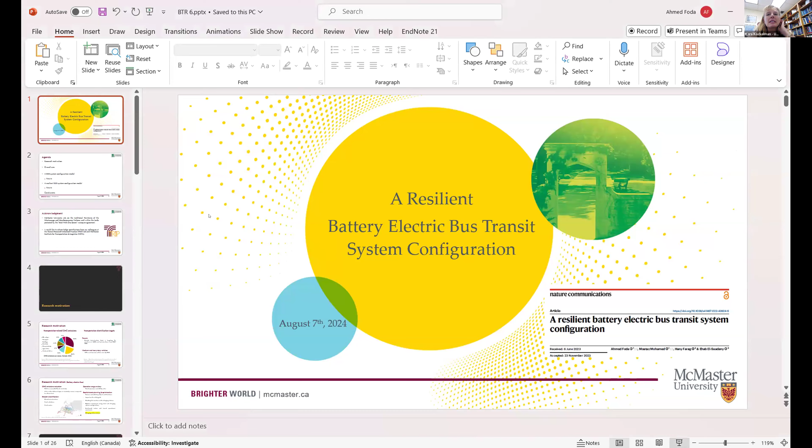Good morning, everyone. Good afternoon, good evening, depending on the place you are. Today I will present, my name is Ahmed Foda, postdoctoral fellow at McMaster University. Today I will present our work titled A Resilient Battery Electric Bus Transit System Configuration. This paper is published in Nature Communications.

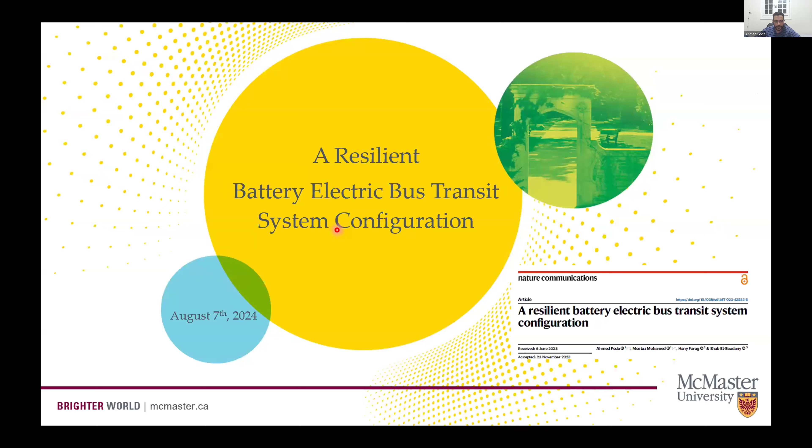My presentation will start by research motivation. After that, I will explain our overall aim in our research and in this contribution specifically. After that, I will discuss two battery electric bus system configuration models. And at the end, I will conclude by some insights from our research.

First of all, I would like to acknowledge the contributions from my colleagues at Trip Lab and also McMaster Institute for Transportation and Logistics.

Motivated by the high share of the transportation-related greenhouse gas emissions, it is often flagged as the first target for emission reduction. One of the main ways to reduce greenhouse gas emissions in transportation is electrification. Our research is mainly focused in transit.

For transit, in Canada, we have a target to reach 5,000 zero-emission buses in the next 5 years, and also for all new sales after 2040 to be zero-emission vehicles.

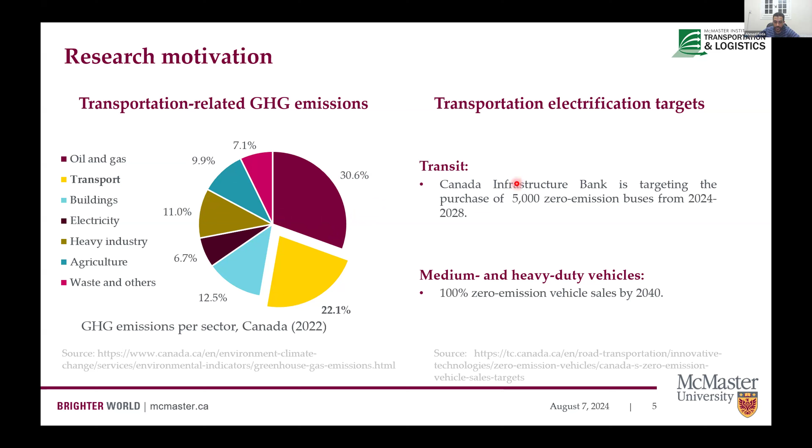The reduction in greenhouse gas emissions after using battery electric buses in transit depends on the electricity sources. If we use renewable-based electricity, it will be almost net zero emission networks. If we use mixed electricity sources, the reduction will be almost 40%.

Another feature making battery electric bus electrification, or the transit electrification, smooth is the transit system characteristics, which includes shared infrastructure, fixed schedules, and also fixed routes.

However, there is a main limitation for using battery electric buses in transit, which is range anxiety. And also there is a need for sophisticated planning and optimization efforts, because we need to decide the optimal location of charging stations, configuration of a charging station, charging schedule, reducing the impact on the utility grid, balancing contradictory objectives and decisions.

And also considering real-world factors and transit operational constraints. There is also an additional point which should be considered in design, which is charging station failure. This point we are focusing on in this research.

The overall aim of my research is to develop a resilient and reliable battery electric bus system configuration that could be applied to any transit network to provide precise planning and operation decisions to transit agencies, including infrastructure location, component sizing, operational energy management system, upfront and ongoing expenses, while considering real-world practices and operations.

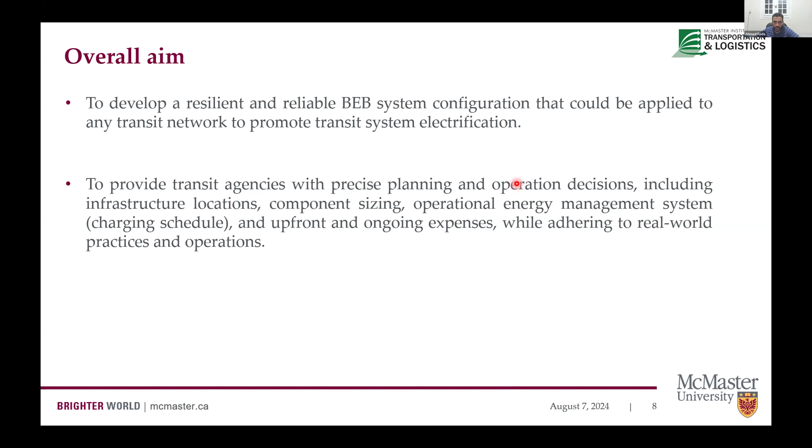For this work, in this paper, we are focusing on constructing a resilient battery electric bus system that is robust against charging station disruptions while maintaining the same level of service of the transit network.

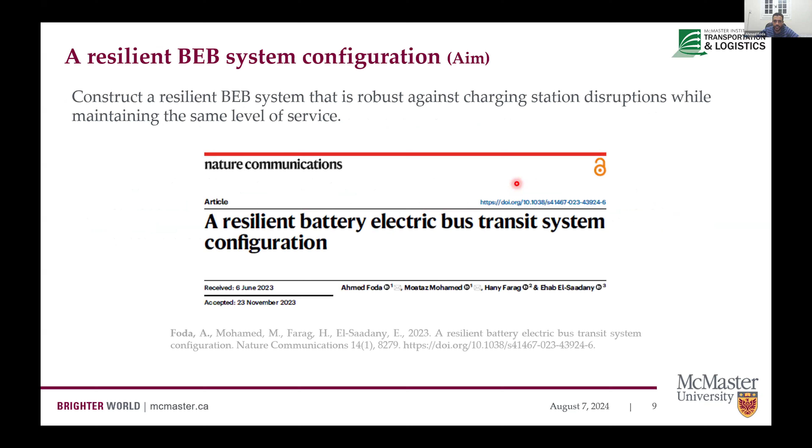First, we designed a generic battery electric bus system configuration model. This model optimizes the upfront and ongoing operational costs for the electrified transit system, including minimizing infrastructure costs, electricity time-of-use tariffs, peak power demand, and well-to-tank greenhouse gas emissions.

This model will provide the optimal location of charging stations, optimal charger rated power, and the number of chargers in each charging location, and also the battery capacity for each bus.

In addition to the infrastructure decision variables, we also provide the operational decision variables, including the charging schedule. This charging schedule will include all the needed information for charging, including where, when, how long, and how much for each charging event for every bus.

This charging schedule will consider partial and continuous charging strategies. All these will be provided while considering adaptable...

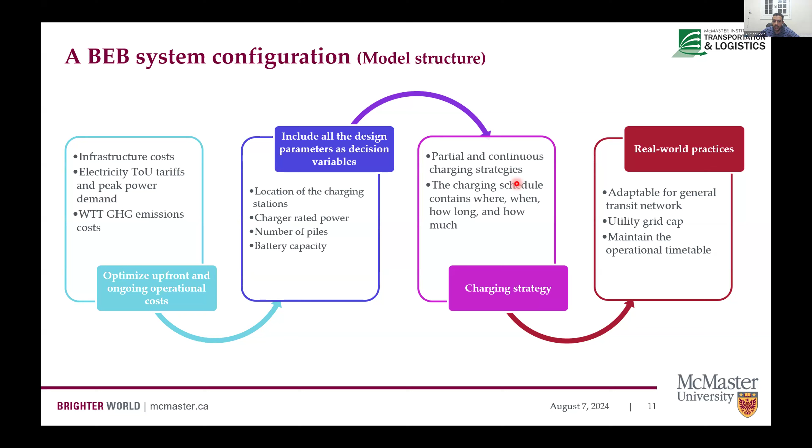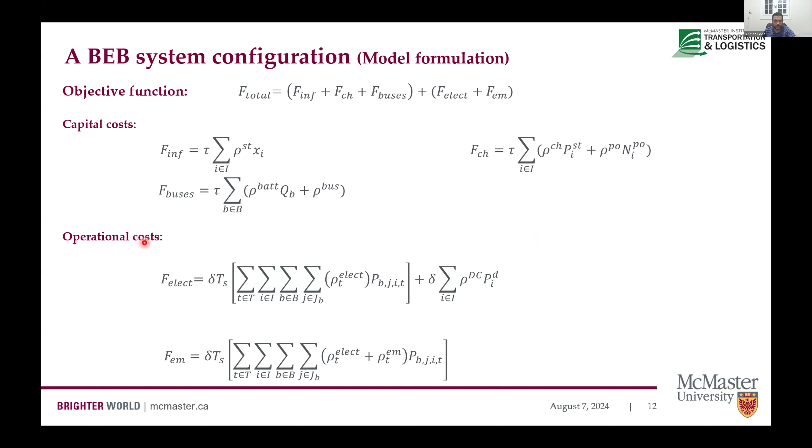This model should be adaptable for general transit networks, including a utility grid cap to reduce the impact on the utility grid, and maintain the operational timetable for the transit network. This is the formulation of our generic model, including capital costs and operational costs, and constraints such as battery electric bus energy constraints, continuous and partial charging schedules, and charging station constraints.

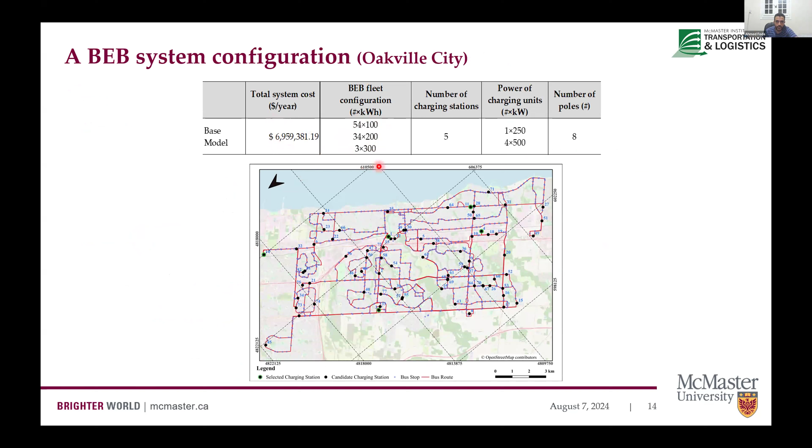We applied this general model to Oakville City. This transit network has 91 buses, and this is the configuration: the total annual system cost, battery electric bus fleet configuration, and the charging station configuration. This is a precise planning for battery electric bus system configuration.

But what if charging stations are disrupted? The charging station could be disrupted because of electricity outage, component failure, or scheduled maintenance. What will be the effect on the battery electric bus fleet? How many buses will fail? What will be the service reduction in the transit system if a charging station is disrupted?

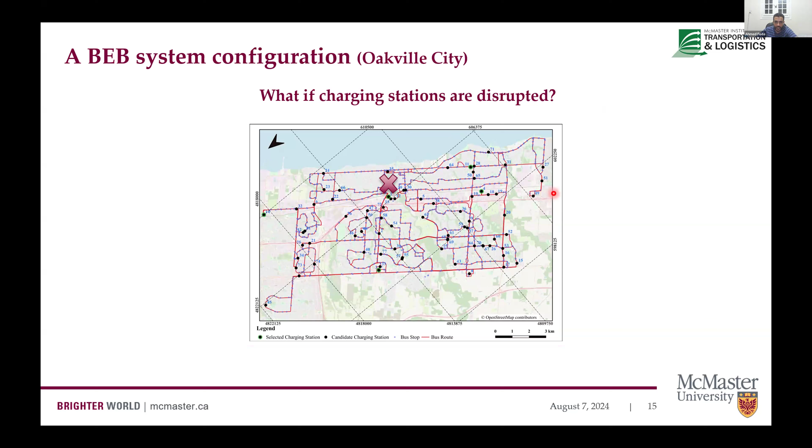We provide some analysis to the design here. In Oakville City, if one charging station is disrupted, the service reduction could be up to 34%. If two charging stations are disrupted at the same time, the service reduction could be up to 58%.

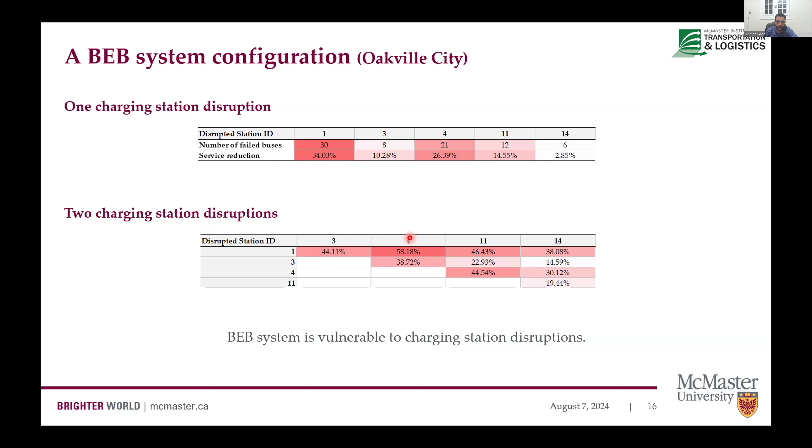From this analysis, we proved that the battery electric bus system is vulnerable to charging station disruptions, and we couldn't ignore the effect of electricity outages or other reasons. We need a resilient battery electric bus system configuration that is robust against charging station disruption.

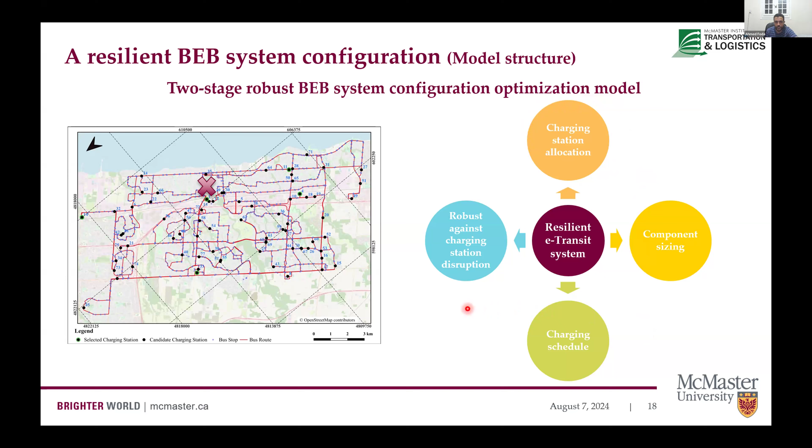Therefore, we developed a two-stage robust battery electric bus system configuration optimization model. This model will provide us with all the planning decision variables, including charging station allocation, component sizing, and charging schedule. In addition, this model will be robust against charging station disruption.

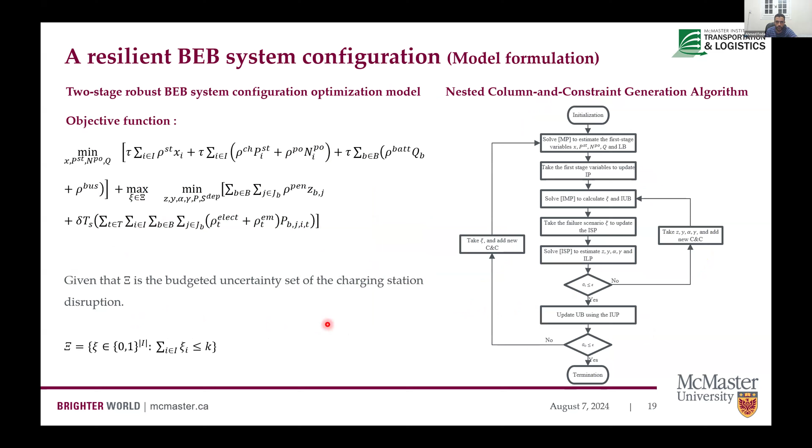This model is formulated as two-stage, with an updated objective function under a budget uncertainty set for the charging station disruption. We used the nested column and constraint generation algorithm to solve this model, and we applied it to Oakville City.

This means the design will provide all the energy and all buses will be fully functional if one charging station is disrupted. The robust model with K equal to 2 will be robust against two charging stations disrupted at the same time, and all buses will operate and finish all scheduled trips.

For example, what is the meaning of full functionality for all buses? Bus ID number 3 needs around 400 kilowatt-hours per day. For robust model K equal to 1, this model is robust against one charging station disruption. This is the distribution of energy charged at each charging location if no disruption occurs.

If one station is disrupted, the charging schedule will be updated and all the required energy will be charged at the other 3 charging stations. This is also the scenario in robust model K equal to 2.

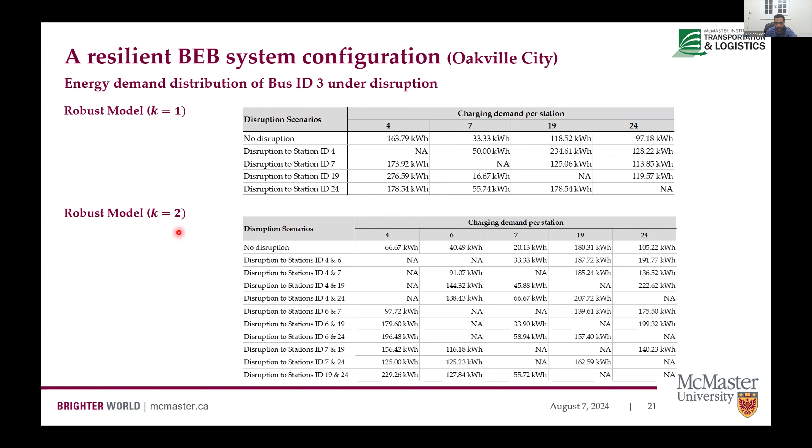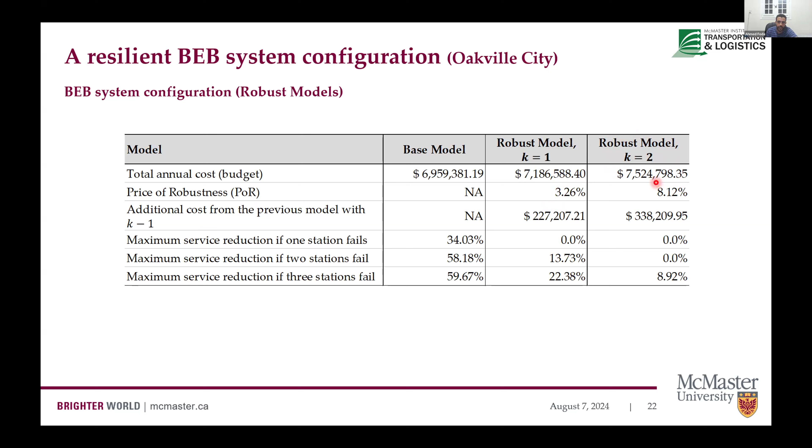But in operations research, we have something called the no free lunch theory. We can't add more benefits without paying some cost. So for the robust or resilient models, we have something called the price of robustness. If we use a robust model with K equal to 1, we pay an additional 3% cost. If we design a robust model with K equal to 2, we pay around 8% additional cost.

This is a comparison between robust model K equal to 1 and K equal to 2 with regard to the base model, in terms of different costs and different energy demand.

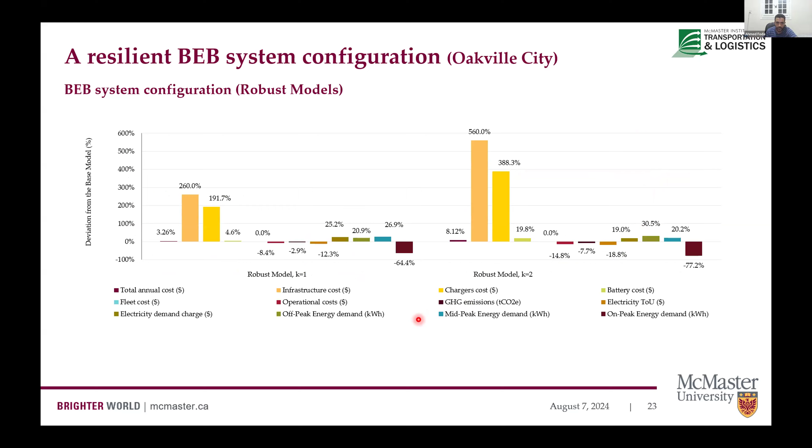From this research, we can conclude that it ensures the optimal resilient battery electric bus system configuration remains fully operational even during failure of charging stations. A resilient battery electric bus system design requires extra costs, but these costs are ultimately lower than the unoptimized expenses incurred after a charging station failure.

The price of robustness for K equal to 1 and K equal to 2 is around 3% and 8% respectively, but these additional costs will prevent a severe reduction in service if one or two charging stations are disrupted. This result shows that the cost of implementing a resilient battery electric bus system is directly related to the conservative level, and determining this level, K in our case, necessitates trading off between factors such as budget and risk in each transit system.

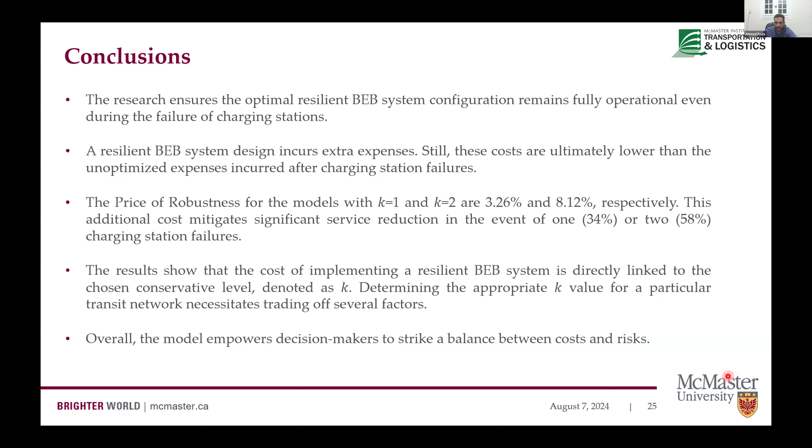Overall, the model empowers decision makers to strike a balance between costs and risks. Thank you so much.

And I think we have our real moderator with us now, Sanjana. Thanks for reading your emails. I just wrote her. Great to have you here. Take it away. Thank you so much, Ahmed. Like I think we are almost back on track in terms of time.

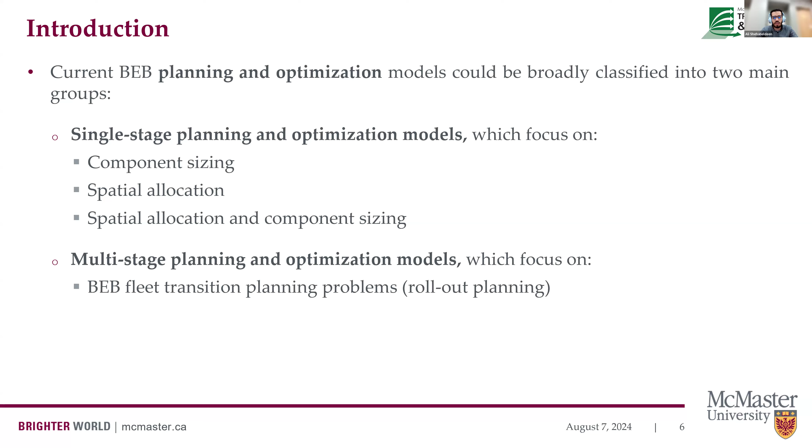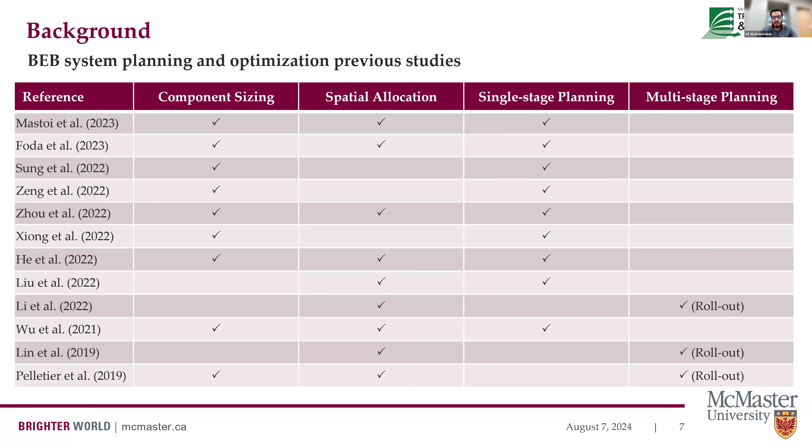This table shows a brief literature review on battery electric bus planning and optimization. As you can see, previous studies determine the optimal battery electric bus system component sizing and the spatial allocation of the charging stations. However, most of them focus on single stage planning. Furthermore, the authors who addressed multi-stage planning only focused on the rollout transition planning, without considering the impact of battery electric bus performance degradation during these transition plans.

As we may know, battery electric bus batteries degrade over time, and this is attributed to cyclic and calendar degradation. Cyclic degradation is associated with charging and discharging cycles as well as temperature. However, the calendar degradation occurs under storage mode when no electric current flows through the battery.

In the literature, there are three main methods to estimate battery degradation: electrochemical, empirical, and semi-empirical methods. In this study, we utilized a semi-empirical one to estimate battery electric bus battery degradation.

Given this previous research gap, the main aim of this study is to answer the main question: what is the impact of battery degradation on the optimal configuration and operation of the battery electric bus system through a 12-year usage life cycle, including spatiotemporal allocation and capacities of charging stations, battery sizing, battery electric bus charging schedule, and battery replacement decisions.

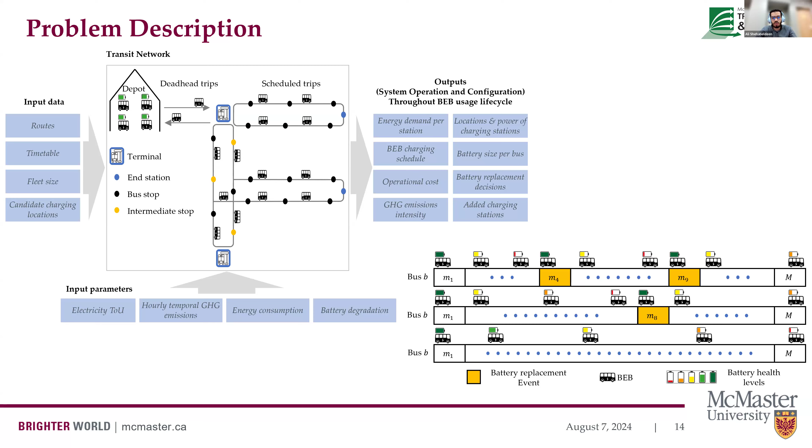Therefore, the main objective is to reduce the total system cost, including capital and operating costs, such as infrastructure cost of the charging station, fleet costs including buses and battery costs, battery replacement costs of purchasing new batteries and selling old ones, electricity time of use, and greenhouse gas emission intensity.

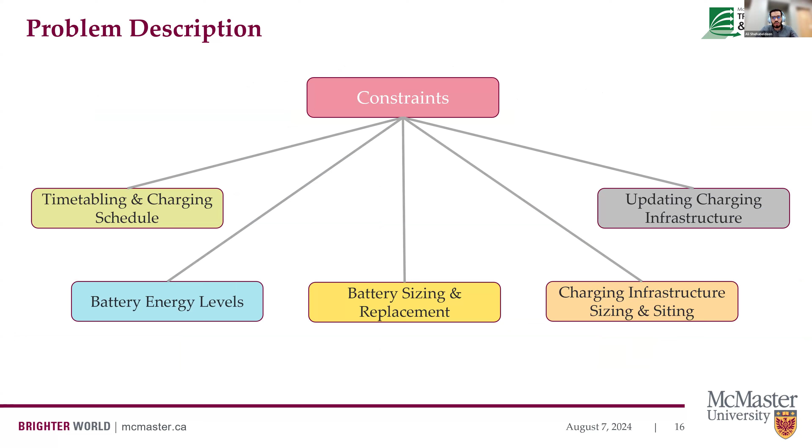This is subject to several constraints, including timetabling and updating charging schedule, battery energy levels, battery sizing and replacement, siting and sizing of the charging station, updating the charging infrastructure, such as adding new charging piles and increasing the capacity of the charging stations.

Our methodology in this study addresses two main challenges. The first is related to integrating battery degradation rates within the optimization model. The second is to develop a multi-stage optimization model that trades off multiple factors, such as battery replacement, adjusting battery electric bus charging schedule, and updating the charging infrastructure to accommodate battery degradation throughout our 12-year usage life cycle.

To address the first challenge, we employed a surrogate-based space mapping algorithm to integrate battery electric bus battery degradation rates within the optimization process. The idea is to develop a coarse model that maps the fine model in a linear formulation, and then this coarse model is improved through an iterative process until a termination criteria is met, reducing the error between the coarse and fine model.

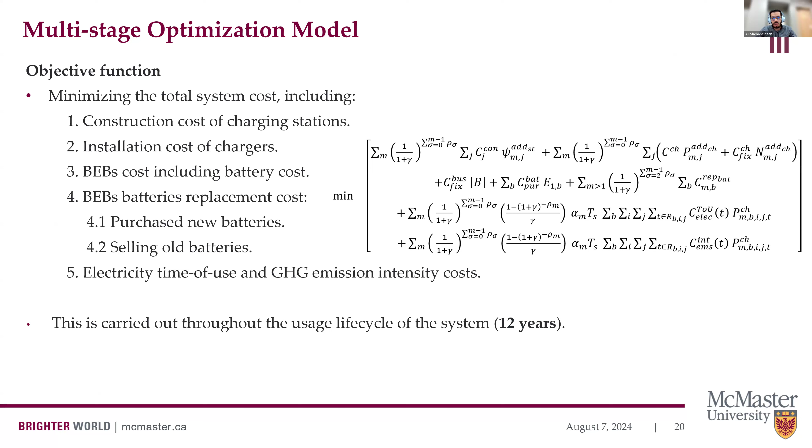Following this approach, we accurately integrate the complex nonlinear battery degradation rates within the optimization process via a mapped linear model. After that, we developed a multi-stage optimization model that informs optimal battery electric bus system configuration and operation, while minimizing the total system cost and considering the impact of battery degradation rates at each stage. As you can see here, we sum over a set of stages respecting the net present value of each stage.

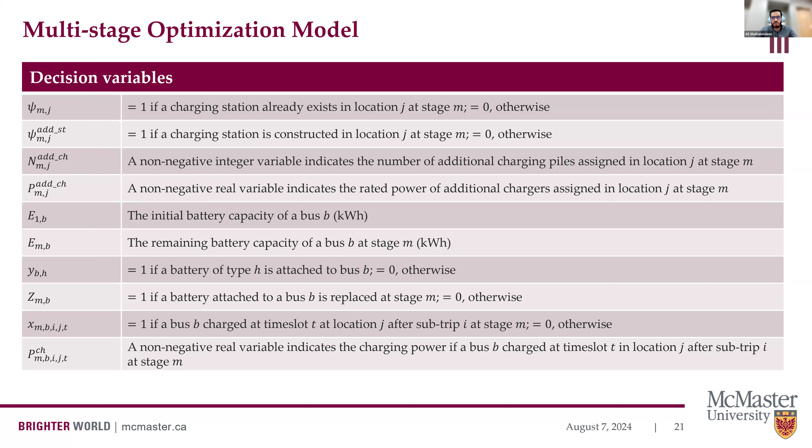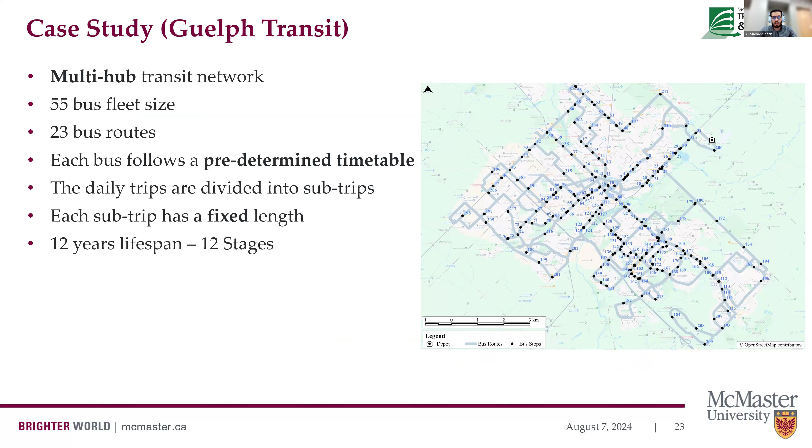We applied the developed model to a multi-hub real-world transit network in Guelph City. The network featured 55 buses and 23 bus routes. Each bus follows a predetermined timetable. The model is tested over a 12-year usage life cycle in 12 stages. As such, our model can inform the transit operators with the optimal configuration and operation decision at the beginning of each year.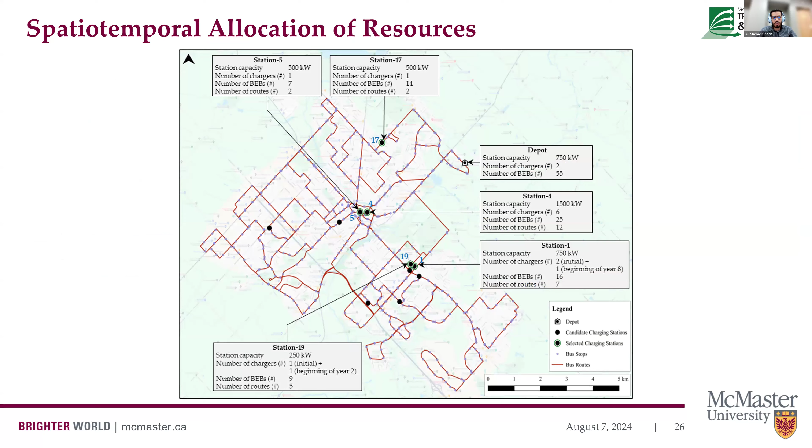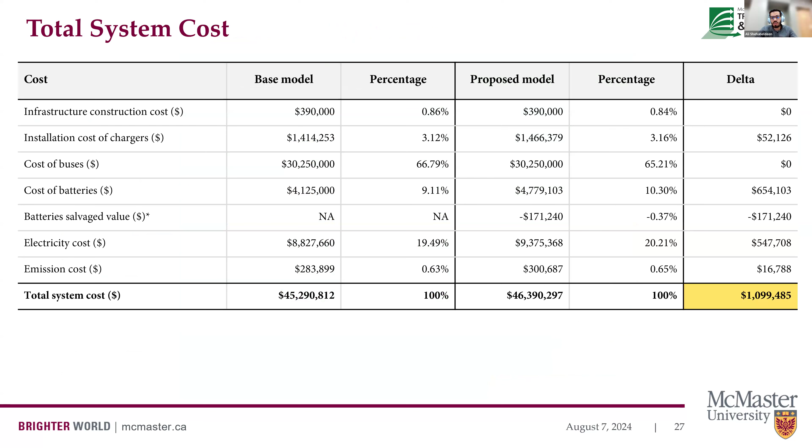Regarding the cost components, this table shows the breakdown of the total system cost. As we can see, considering battery degradation increases the total system cost. However, this cost ensures the feasibility of the battery electric bus system throughout its usage life cycle.

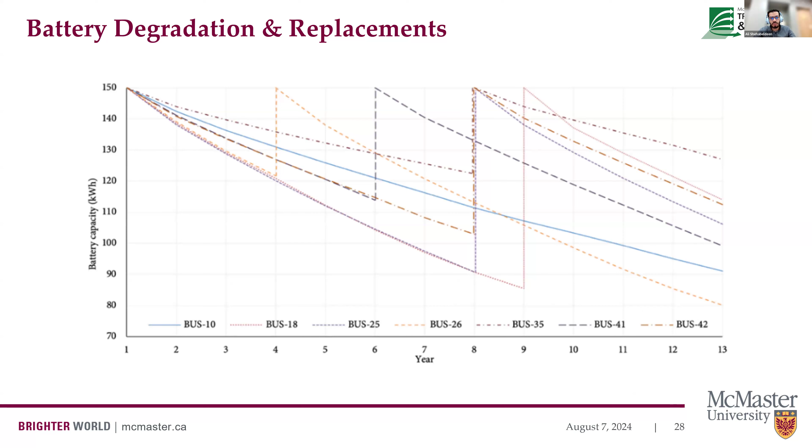Additionally, this figure highlights adjustments in the charging schedule over time to accommodate battery degradation. Unlike the current practice of replacing batteries at 80% of its initial capacity, this figure highlights the importance of integrating battery replacement decision within the optimization process.

That's it. Thank you. And I need to acknowledge that this paper is published in Energy. Thank you.

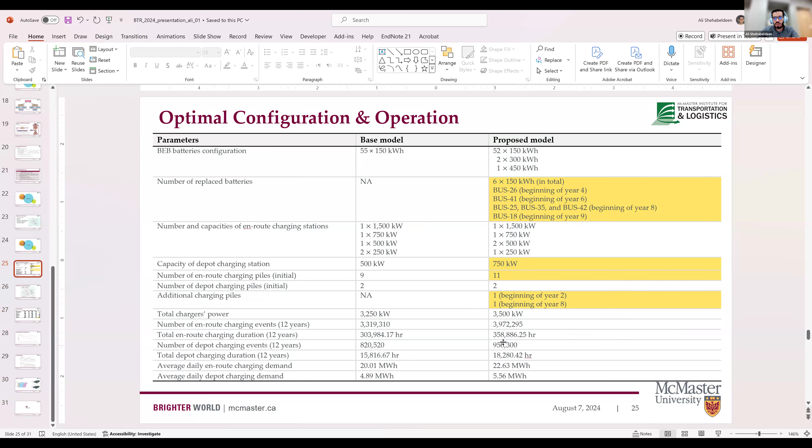Let me just pull up the slides again. Back to the table here. There are 6 buses with battery replacement. This increases the cost. Also, we can see the capacity of the charging station increased. Additional charging piles are added, and there's fluctuation in the charging schedule. This impacts the total system cost here. This is a breakdown for all costs, and the increased percentage between the base model without considering battery degradation and the proposed model considering battery degradation.

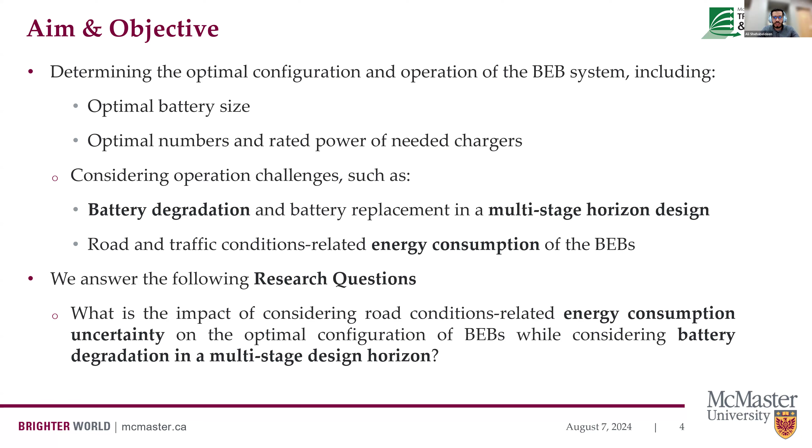Our study aimed to develop a multi-stage optimization model that determines the optimal battery electric bus system configuration and operation, including optimal battery size, spatial allocation of the charging station, number and rated power of the charging piles, while considering battery degradation and energy consumption uncertainty in a multi-stage horizon design.

To achieve this goal, first, we utilized the multi-stage deterministic model developed in our previous study to minimize the total capital cost by determining the optimal allocation of charging stations and component sizing of the battery electric bus system, while considering battery degradation rates and replacement decisions throughout the usage life cycle.

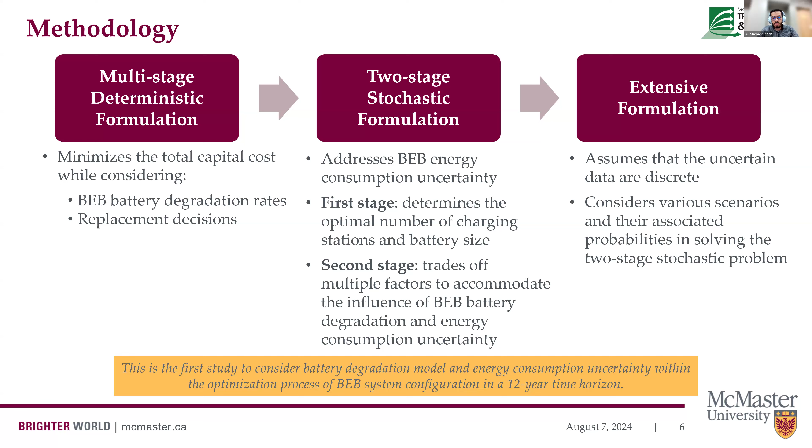Secondly, a two-stage stochastic formulation is developed to address the uncertainties associated with battery electric bus energy consumption. In the first stage, the model determines the optimal number of charging stations and the required battery size for each bus, while in the second stage, the model trades off multiple factors such as replacing batteries, increasing the capacity of the charging station, adding en-route chargers, and adjusting battery electric bus charging schedules to accommodate battery degradation and uncertain events. Lastly, an extensive formulation is developed, assuming discrete uncertain events to examine the model's performance under various uncertain degrees.

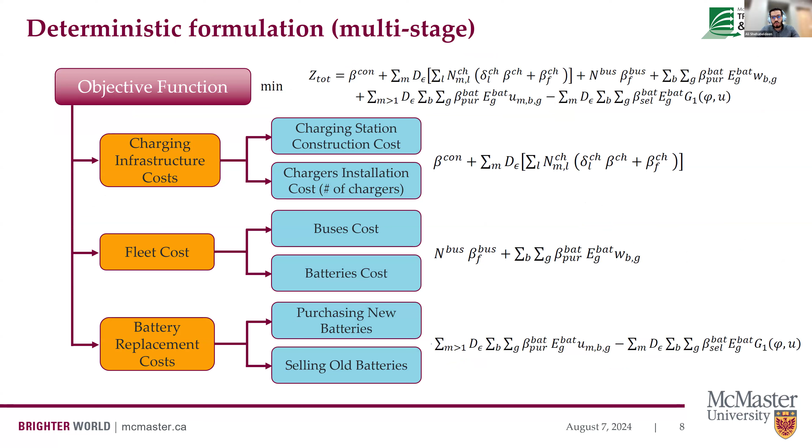Here we utilize the deterministic model of the previous study, as I described before. The objective function is to minimize the total capital cost, including infrastructure cost of a charging station, fleet cost of purchasing buses and batteries, and battery replacement cost, including purchasing new batteries and selling degraded batteries.

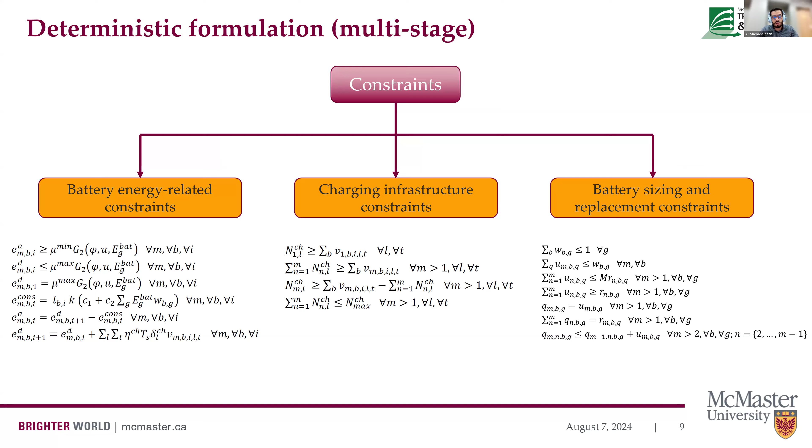This diagram simplifies the idea of two-stage stochastic formulation. As we can see, the first stage determines the optimal allocation and the number of charging stations, as well as battery electric bus battery size, while the second stage trades off between adding more chargers, increasing the capacity of charging station, or replacing batteries and adjusting battery charging schedule based on the battery degradation rates and energy consumption random events.

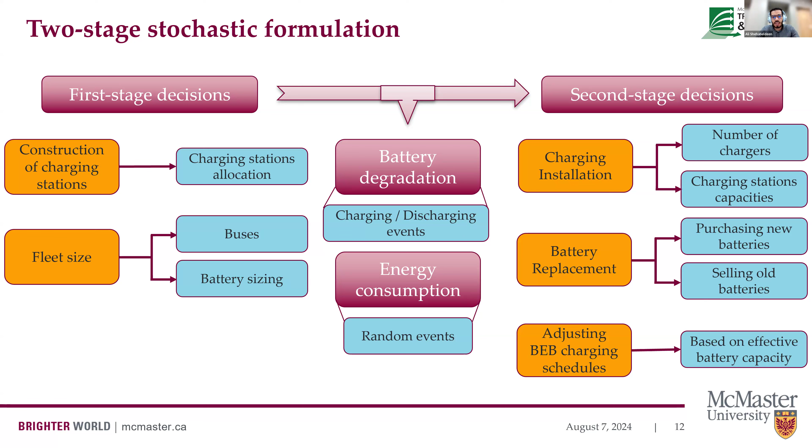This is the objective function and the recourse function for the developed two-stage stochastic formulation. Then we converted the two-stage stochastic formulation to the extensive formulation that assumed discrete energy consumption events. This approach facilitates the solvability of the two-stage stochastic problem, considering various scenarios where S here represents different scenarios and Ps is probability of each scenario.

However, this formulation is highly sensitive to the number of scenarios, as increasing the number of scenarios increases the dimensions of the optimization model.

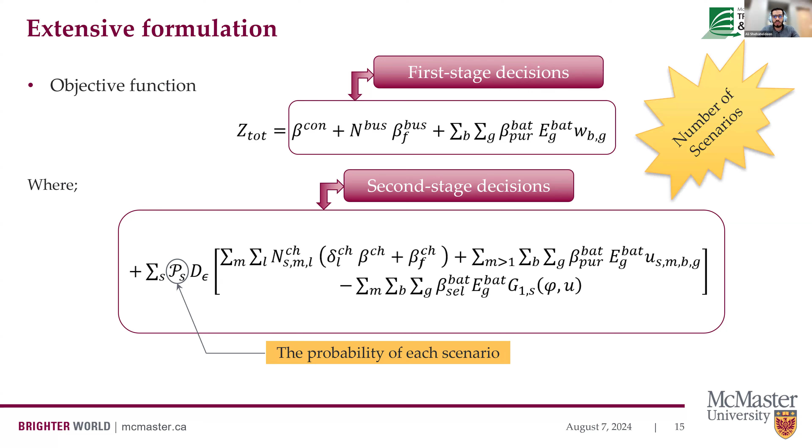We applied the proposed model to a real-world hub-and-spoke transit network in Belleville City. As shown in the figure, the network features 11 buses and 10 bus lines. Each bus follows a predefined timetable. The daily trips are divided into a set of sub-trips within fixed length.

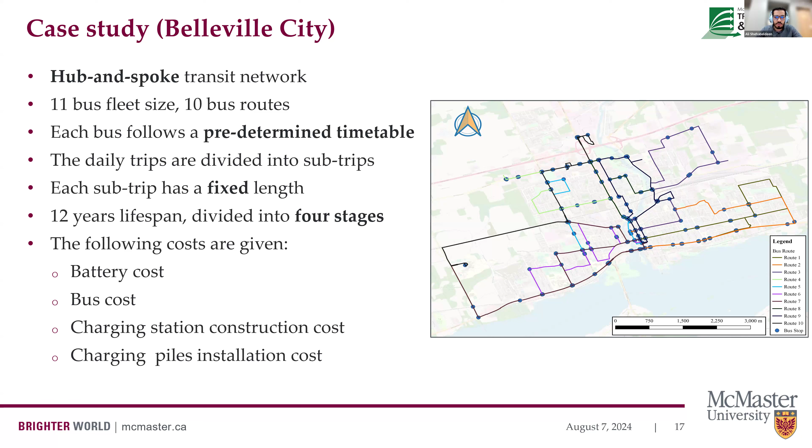The model is tested over a 12-year usage life cycle divided into 4 stages. As such, the model informs transit operators with the optimal decisions at the beginning of each stage, here being 3 years. This study assumed that the energy consumption uncertainty changes follow a normal distribution.

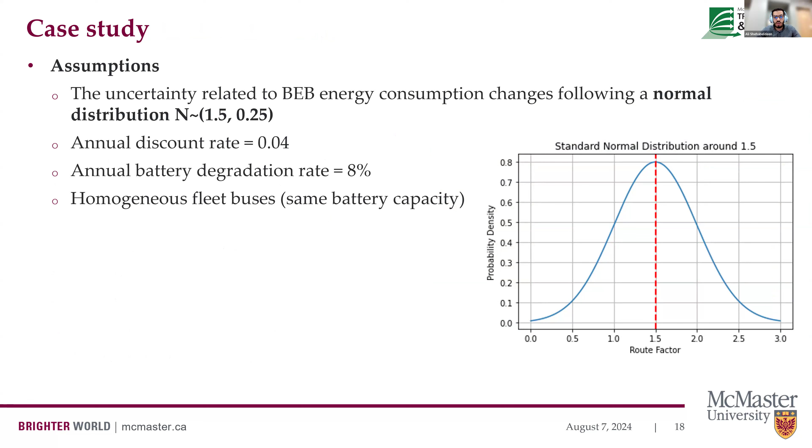A 4% annual discount rate and 8% annual battery degradation rate are considered. This study also assumed homogeneous buses in terms of battery size.

For the extensive formulation, we normalized the normal distribution into 3 parts with given probabilities to address the impact of uncertainty related to energy consumption.

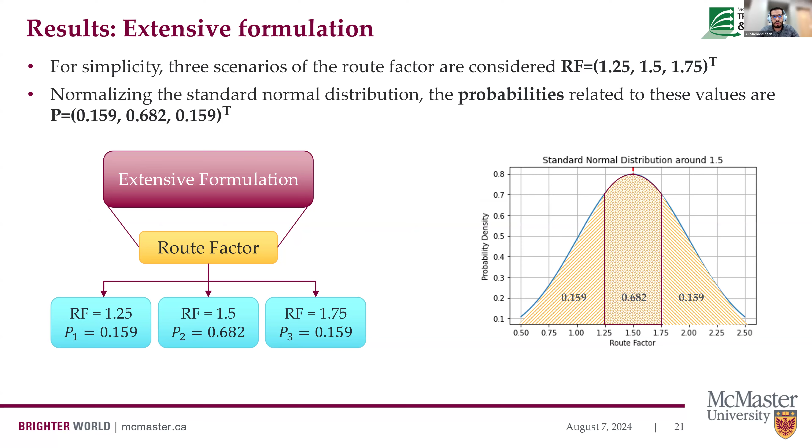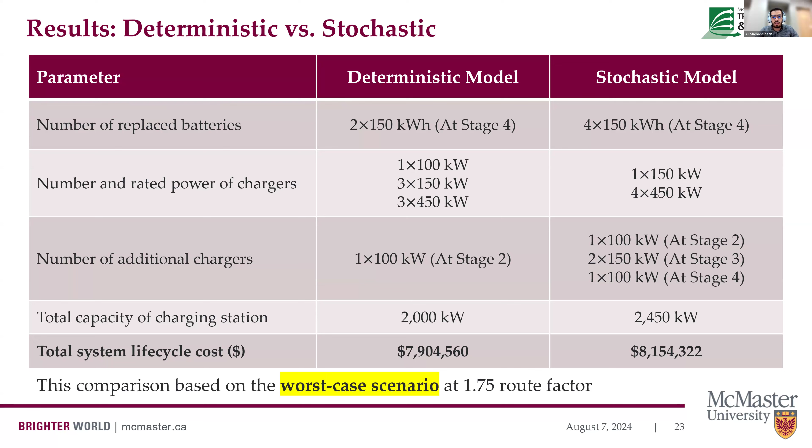After applying the extensive formulation of the developed two-stage stochastic model to the case study, the optimization model determines the optimal number and rated power of charging stations at the first stage, while at the second stage, the model behaves in different ways by trading off multiple factors to address the impact of battery degradation and energy consumption over time. The comparison between the deterministic and stochastic model under the worst case scenario highlights the crucial role of integrating energy consumption uncertainty and battery degradation rates while optimizing battery electric buses in transit systems, and overlooking these measures during the optimization process could result in suboptimal solutions.

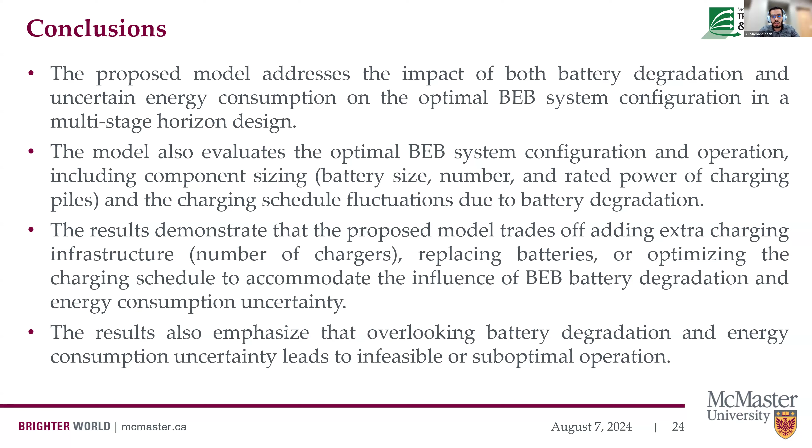In conclusion, this study highlights the impact of both battery degradation and uncertain energy consumption on the optimal battery electric bus system configuration and operation in a multi-stage horizon design. This includes optimal component sizing and location of charging stations, number and rated power of chargers, and adjusting the charging schedule to accommodate operational challenges over time. Also, the results demonstrate that overlooking battery degradation and energy consumption uncertainty could lead to suboptimal operation. Thank you.

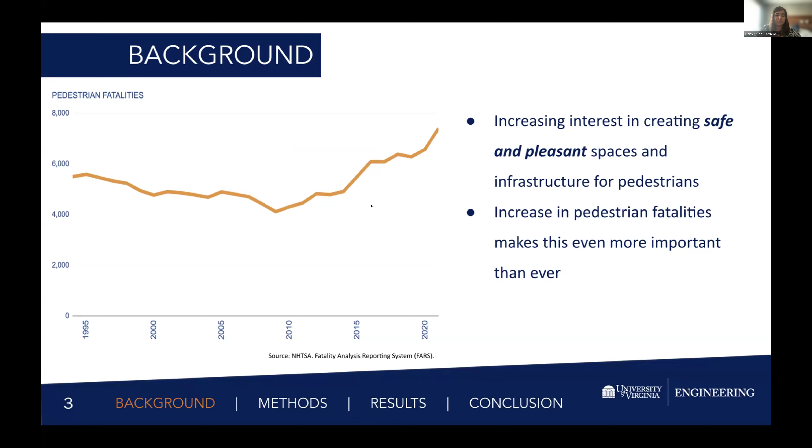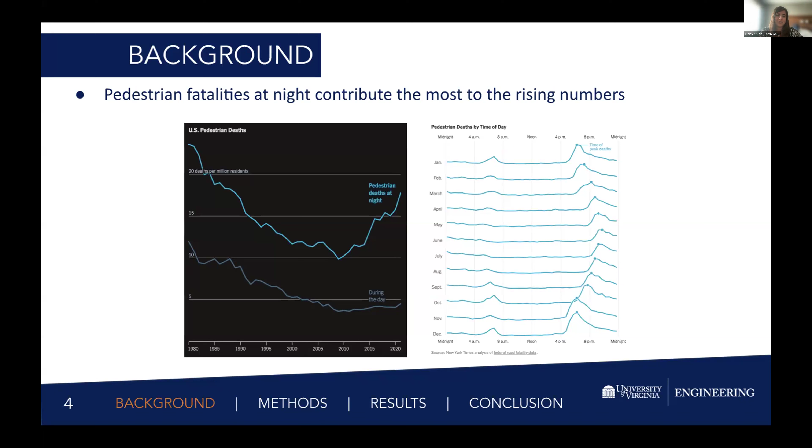There's been some research on this from the driver's perspective, and more limited research on the pedestrian perspective. So understanding pedestrian behavior and how people interact with the built environment at night is an important aspect in identifying the cause and hopefully contributing to some solutions.

Walking is one of the most sustainable and equitable modes of transportation, but as we can see with increasing fatalities, pedestrians represent some of the most vulnerable road users, and people often forgo walking when they feel conditions are unsafe. Having safe and pleasant pedestrian infrastructure is really essential for promoting this form of mobility.

As people move through city streets, they're exposed to an array of stimuli, both visual and auditory, and attention is directed towards elements including people, signage, vehicles, buildings, and other factors throughout the environment.

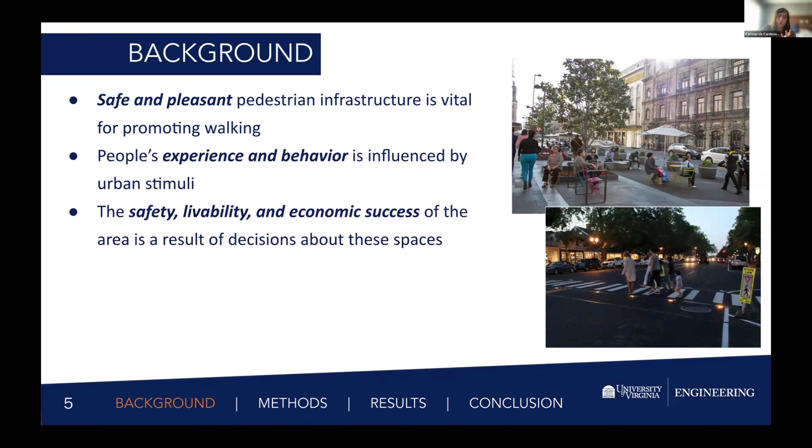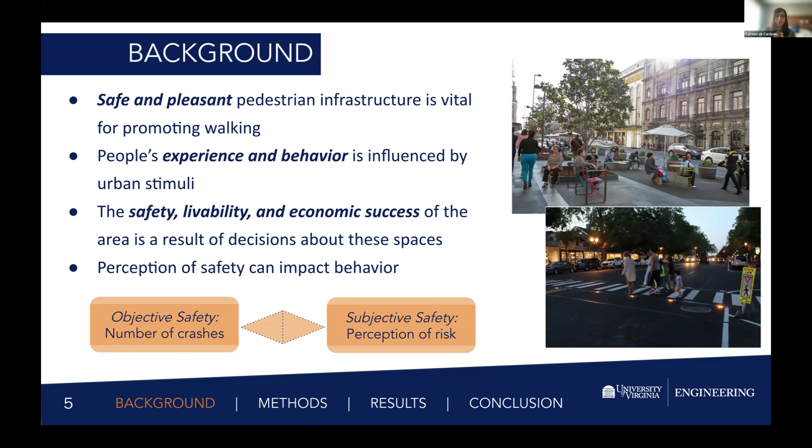Decision makers often have a large influence on what stimuli is present and what the conditions of the road and streetscape are. And when we're looking at the perception of safety, there's really two main types: objective safety, which focuses on the number of crashes, and subjective safety, which is more the perception of risks that vulnerable road users are experiencing. This research is more focused on that second one, and being able to have a more preventative approach to pedestrian safety.

That said, it's been difficult to measure and gain insight about the experience with the technology previously available. So this introduction of mobile sensors and our mobile eye tracking glasses has allowed for this kind of study to be developed, but it's still in a relatively new stage, and we're figuring out the best way to use it. The goal with the study was both to understand the differences in the psychological, physiological, and cognitive perception during the day and night, but also exploring this technology further and the best way to use it to do this kind of user-centric study.

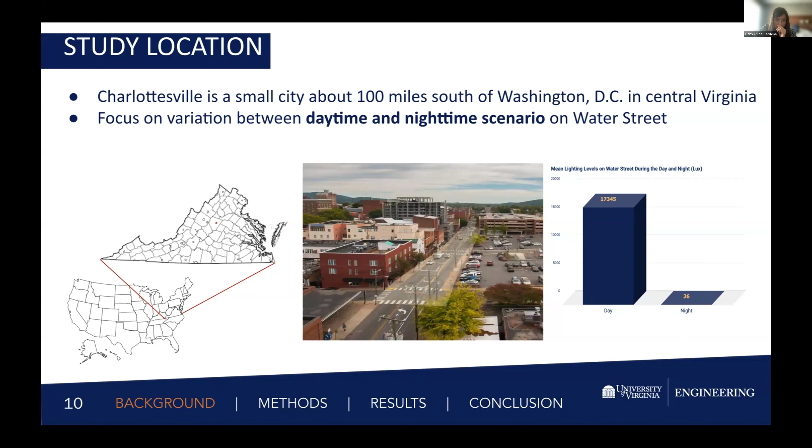This is eight blocks of walking total. We had them walk down the first north side of the street. Everyone had to walk that part and cross over. Once they got to the other side of the street, we opened it up so they could cross back. The only instruction was that they meet us back at our starting point, this orange dot, to open it up to see what their natural behavior was when we didn't have a predefined route.

So we had that first part that was predetermined, and then got a little bit more of an open thing. We had 63 participants, and they all did the experiment once during the day and once during the night, and we switched the order, to try to account for any differences there with becoming more familiar with the route.

And then we had everyone fill out a post-experiment questionnaire, which addressed having them mark any locations that they felt particularly safe or particularly unsafe, where they crossed and why they decided to choose that, to gain a little bit more insight on some of the behavior and choices that they made.

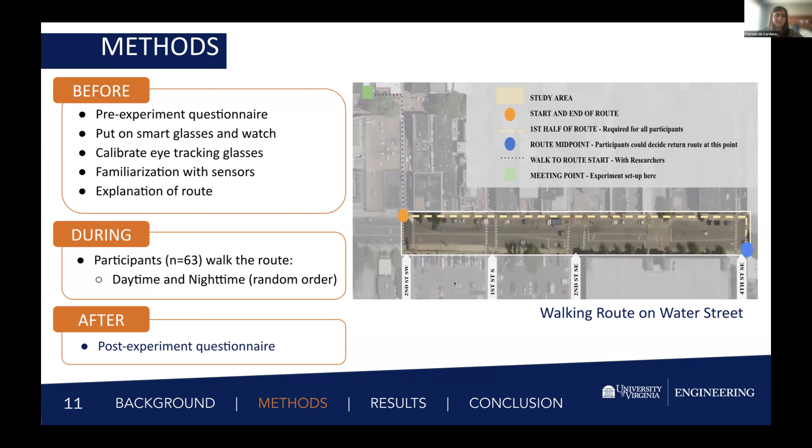So we collected a lot of data because we're trying to understand - the focus is really on the eye movement data, but we also covered the physiological data, audio data, demographic data, the crossing behavior. A big part of it was the lighting conditions.

And so we measured the lux level along the route at different times of day to get an understanding of the impact that had. We also collected some air quality and temperature data, just to understand the conditions and if that had an impact.

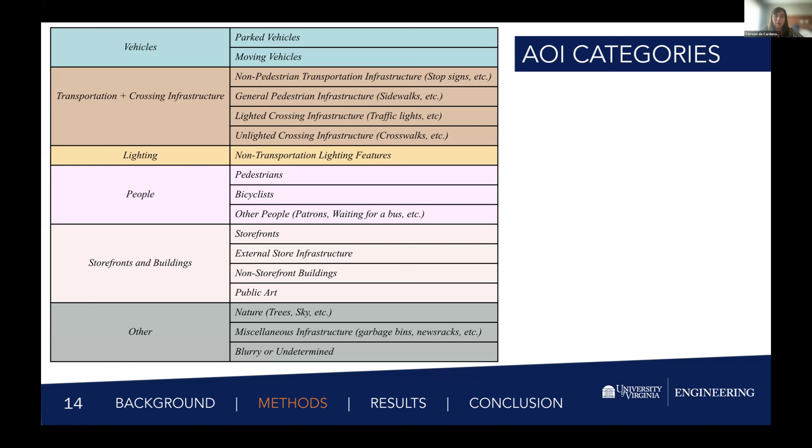And this is an example of all those categories and what that looked like in the software. So it just highlighted what it was, and we had to reclassify that into the categories.

So after the remapping, we did some initial analysis on the metrics to identify any variation. The first thing we looked at was the mean share of fixation duration. And the most notable change we saw was that the vehicles, lighted crossing infrastructure and general lighting features all had the greatest increase at night.

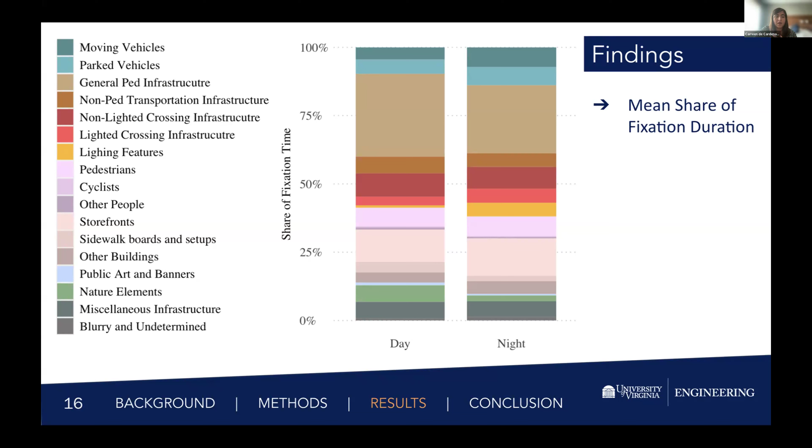And there was also this notable increase on storefronts, likely because a lot of the stores we noticed kept their lights on at night. So again, it was this lighted feature, even though the store itself was closed.

And then we wanted to look at the total fixation duration as well. So a lot of what we're doing is exploring the different kinds of metrics and what's the best way to - which metrics are the best to use for this kind of work.

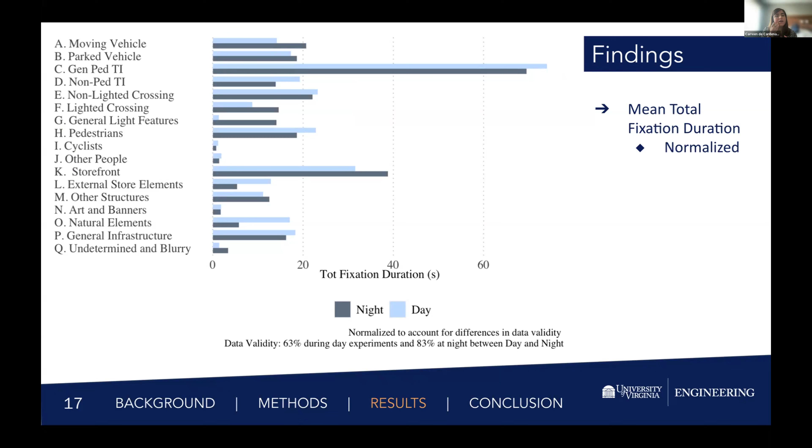With this one, there are some differences in the data validity between the two scenarios because the glare from the sun caused the mean validity rate to be 63% during the day and 83% at night. So we had to do some normalizing of the data in this circumstance to compare. And other than pedestrians, most categories still saw the same trend of increasing and decreasing - for the most part, the trends were similar.

And then a big focus with this was that we had this relatively larger sample size for this type of study. We had 63 people, and we wanted to really make sure the representation was across all age ranges. So it ranged from 20 to 88 years old, and having that be an important factor for making sure that all levels of ability are included.

And with that, we were able to separate that out. So we were working on some disaggregation and looking at the trends there. Interestingly, with this one, we saw there was a bigger shift to paying attention to the general infrastructure, like sidewalks and just looking down.

There's a lot of comments with the qualitative analysis done with people's responses, and a lot of people mentioned the unevenness of the sidewalks, and I think all but one were in at least 40 and up, predominantly in the 60s, 70s and 80s age ranges. So there's definitely a greater concern about that and being concerned about tripping.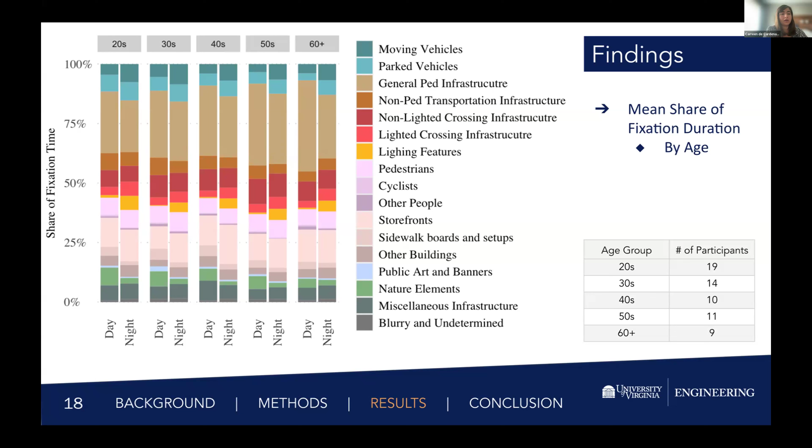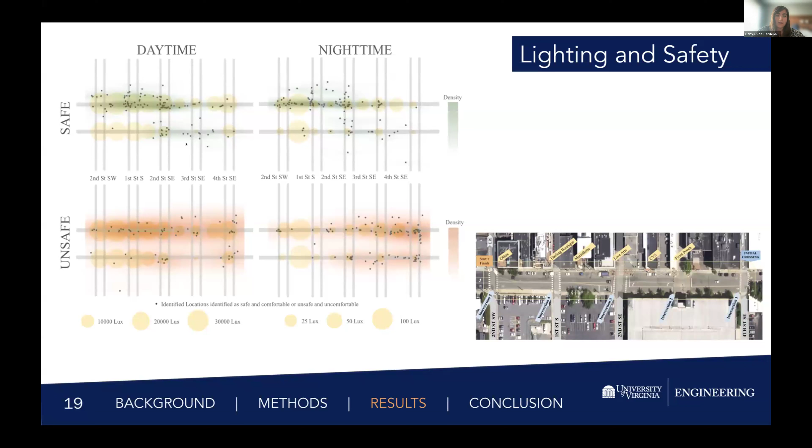So yeah, attention generally shifted to the lighted infrastructure and vehicles at night. There seemed to be this influence on visual behavior with sense of age, but particularly what we're seeing right now is attention paid to the sidewalk and those conditions, having to be a little bit more distracted potentially by those factors if you're more concerned with tripping.

There's a strong connection between the lighting levels and perception of safety and visual behavior. And the perception of safety was also influenced. A lot of people mentioned things with the infrastructure conditions, interaction with vehicles, people, and building design was brought up a lot. So further analysis is needed to understand that connection between visual behavior and how it relates to actions and stated preference a little bit more. We're working on further digging into that.

But a big thing is being able to see the connection between how these mobile sensors can better understand pedestrian behavior, perception, and sense of stress when evaluating these infrastructure alternatives, and providing a framework for future research to evaluate how design and policies alter that urban experience, and hopefully be able to make the streets safer and more engaging spaces.

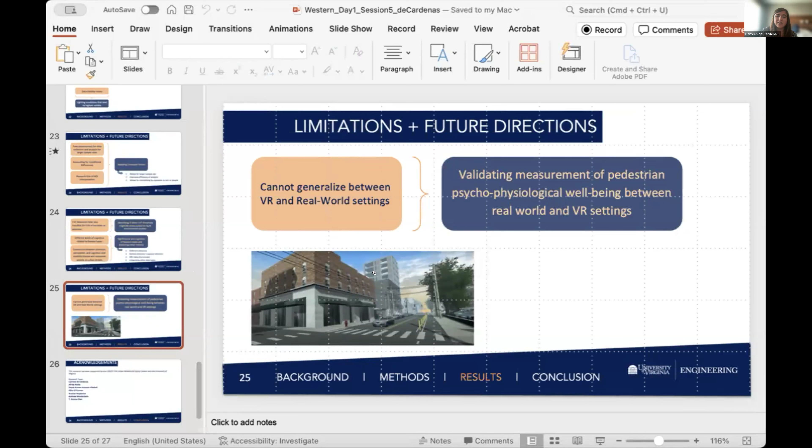A big part too is that there's a lot of VR virtual reality studies that have been done, but there hasn't been a lot of validating between VR and the real world. So that's another thing we're hoping to do. We have the whole route that we did in a real world setting also done in a VR setting, so we'll hopefully be able to do some work with that.